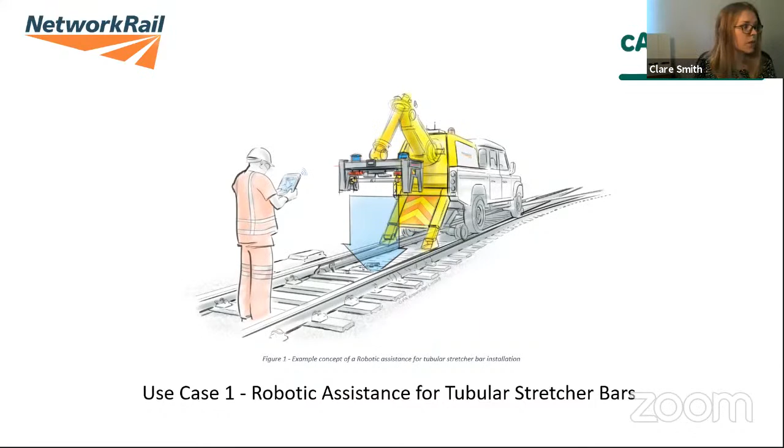So the equipment referred to previously is shown here. You can see the colourful variants of motion units, and underneath those is a tubular stretcher bar. And there are also variants of these. One tubular stretcher bar is installed with two motion units attached to it, one on either end. The combination of motion units and stretcher bar is determined by Network Rail standards, and this is prior to the task, and they can be pre-prepared by a competent operator to produce what we'll call the cassette, so the motion units and the bar attached, I'm going to refer to as the cassette from now.

This pre-prepared cassette should then be lifted by the robotic arm onto the vehicle for transportation to site, and that will eliminate the manual handling instance, the first instance of that. The number of cassettes that are needed per job can vary, and this is between 2 to 7 in order to complete one switch installation. Ideally, the robotic system will accept all variants of tubular stretcher bars and motion units, and they are all of very similar size and build.

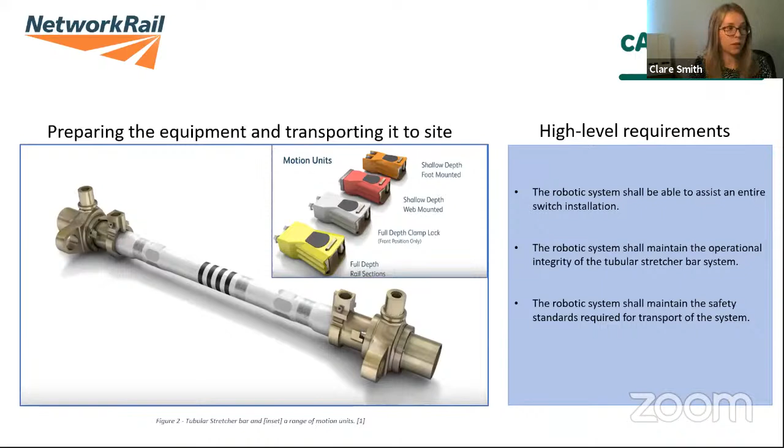Once at site, dependent upon the job, typically an old tubular stretcher bar and motion units needs to be removed first. This involves unbolting the motion units, which you can see on these pictures are the yellow ones. We unbolt them from the rail before lifting the cassette from between the rails. It's essential that the robotic arm can complete the lifting element of this task, and it's desirable in the future, perhaps, for it to be able to remove the bolts as well.

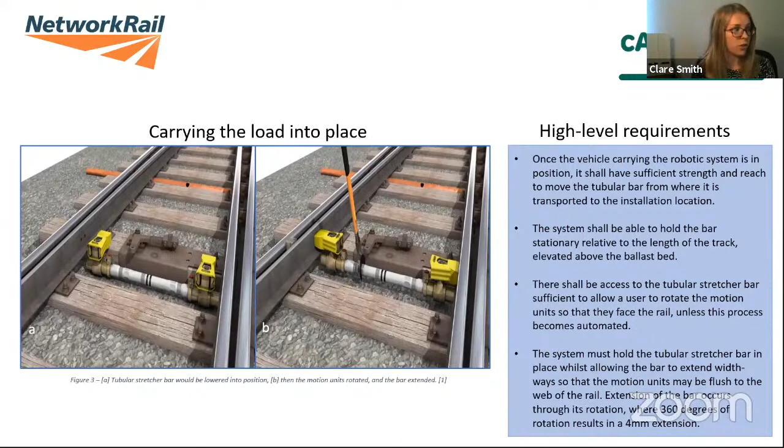So once the bar and motion units are in the correct orientation, the operator drops gauges between the motion units and the rail, and these measure the distance between the two. There's a specific measurement required for both sides of the rail, and this ranges between 2 to 60 millimeters. And this is based on calculations using the width of the rail, and it depends on which side of the rail we're on, whether it's the open switch side or the other side of the rail.

So as a recap, at present, our essential criteria for the robotic arm are the ability to lift a pre-assembled cassette of around 75 kilograms, the capacity to hold a cassette in place, enabling operators to safely move around it and complete adjustment and securing or unsecuring tasks. And we have ambitions in the future for the robotic arm to be able to adjust the length of the tubular stretcher bar and position the motion units via rotation, measure small distances between the rail and the motion units, and untighten or tighten the bolts to a specified torque.

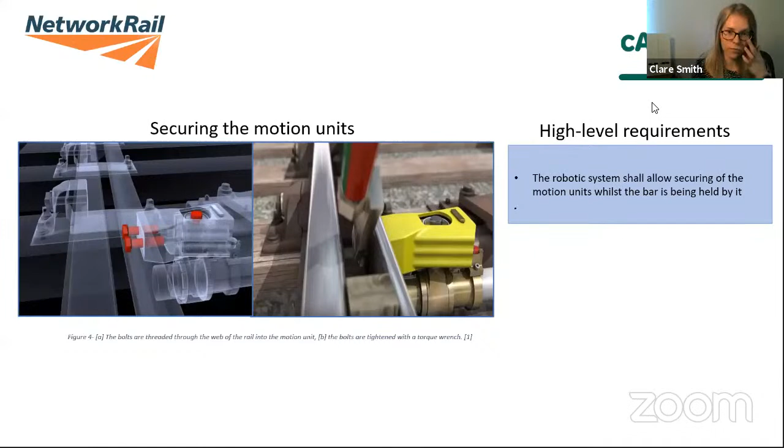Morning, I'm Dave Clements. I'm the Senior Asset Engineer for Rail Management in Wales. Just to give you a quick overview of what we're looking for. So we've got various inspection trains that have got an array of inspection technology used to provide data to maintenance and asset management, so we can manage our rails.

Sometimes the technology breaks down or train pathing issues mean we've got a section of track that's missed. We can either request another run of the train, which can be disruptive to other routes, or we do currently have another mechanical means which requires us to take a possession of the line, or we do it on foot by pedestrian testing and inspection.

So the loss in train-based inspection can limit our data collection coverage, doesn't always fulfill the data capture that we need, which could mean we've got to wait till the next planned run, which could be in 6 months' time, to recapture and update the data that we collect.

Pedestrian inspection on foot has quite a few drawbacks. It interferes with other planned inspection work, can cause a backlog in our other planned work. It requires staff to walk on the track. We're moving to 100% green zone, so it requires a lot more planning these days. The speed of the inspection is obviously reduced. The distance that we can cover is limited, and the data collection is limited. We haven't got technology that records as we go currently.

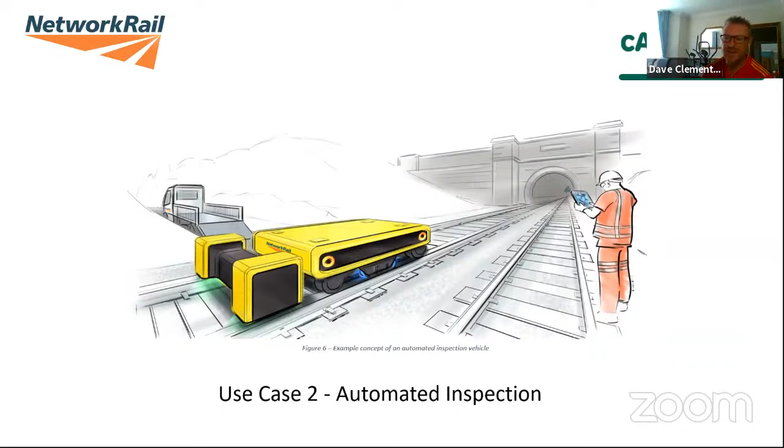So we're looking for something that can do ultrasonic testing, a means of detecting rolling contact fatigue, a means of capturing the rail profile, rail depth, camera footage along its journey. It needs to be ergonomically friendly, easy to handle. And the most important thing for me is locational accuracy. If you go to the next slide, please, Alice.

So it says here, product must find, define, and verify rail defects. Currently, we've got the ultrasonic test train, which gives us suspect defects. I can't see any means at the moment with robotics that may verify suspect defects for us. We're talking robotic arms and probe manipulation and all sorts of things like that for that. So at the moment, we're looking for something that can tell us there's probably a defect there, and then we send someone out to verify it.

An example concept in the system could be an autonomous vehicle that could be loaded at one access point and travel to a predetermined access point at the other end. Not just for recovering things that the train has missed, but we could use, say, Severn Tunnel as an example, which is 4.5 miles long. We could stick it at one end, pick it up the other end, and it records all the rail data we need through that tunnel without having to walk through the tunnel.

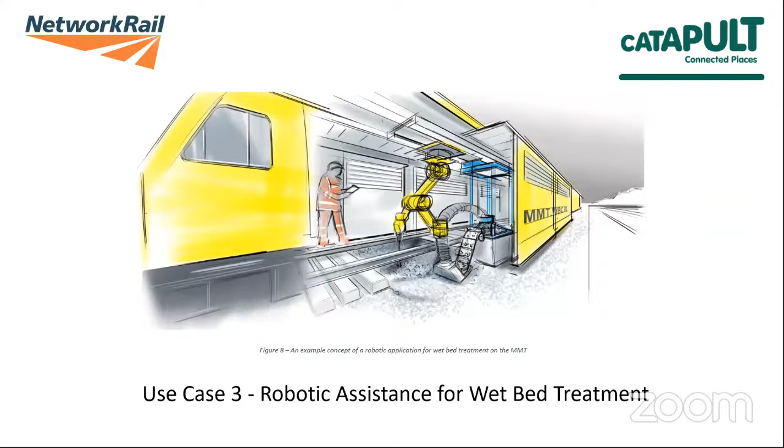In this case, we're looking for some robotic arm to help with wet bed removal. Currently, labour-intensive routines are conducted within the mobile maintenance train, which can be improved upon for the health and safety and maintenance of the teams.

At the minute, we have risks such as repetitive strain injuries, injuries through manual handling, and also exposure to vibrations. We're looking to investigate ways to reduce the likelihood of these injuries and improve where possible. Some of these difficult tasks lend themselves to robotics because of their repetitive nature, or a well-defined workspace, or the style of work, such as being labour-intensive.

A robotic arm tool developed to conduct some of these repetitive labour-intensive tasks could improve maintenance personnel's well-being. Additionally, the automatic recording of maintenance data during the robotic application's work could improve visibility of network rail status. Through discussions with the sponsor of the route and the maintenance team, the treatment of wet beds has been selected as an activity that would greatly benefit from robotic assistance. Next slide, please, Alice.

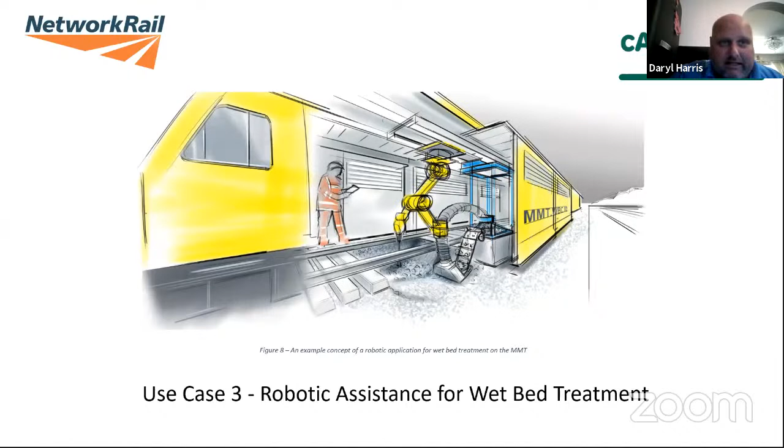As you can see from the diagrams, the localized area of wet beds, spoiled ballast, can be anything from 3, 4, 5 beds, ranging up to 60 plus beds. So when the teams arrive on site, they have to break up the spoiled ballast by use of a breaker, which at the minute is a vibrating Hilti tool. The ballast is then removed manually, bagged up and removed by the hoist on the MMT. We can remove in a shift up to 10 tons of spoiled ballast manually.

So we're looking at something that can assist with the removal of this ballast, also bag it up and remove it from site or into the intermediate cart on the train. Once the spoils are removed from between the sleepers, we then move to remove the spoiled ballast from underneath the sleepers, creating a good flat bed for us to reintroduce new stone and consolidate against. We're looking at digging a minimum of 8 to 10 inch below the sleepers with a crossfall of about 3 inch, 75 mil if possible.

And then after the new ballast is put back into the track, it needs to be consolidated. At the moment, we're using Robel's vertical tampers, but this can still leave us with a 5-day consolidation period after with full traffic before we can lift any hot weather requirements for watching and inspecting to make sure the track doesn't move. So if we could find something that could help remove the ballast, reintroduce the ballast and then consolidate after, that would be ideal.

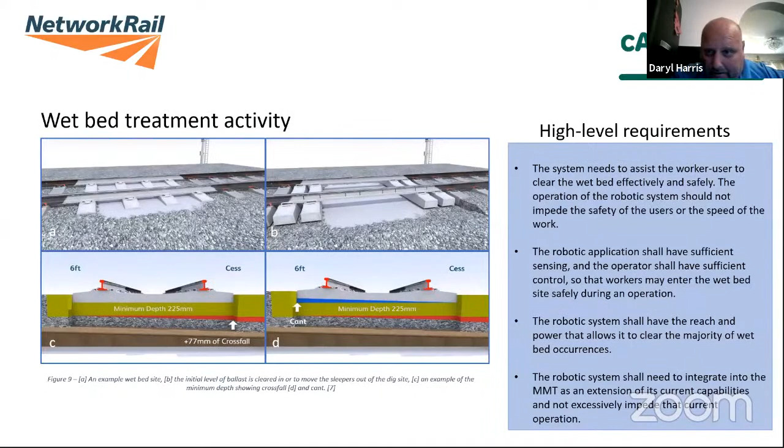I think we've covered most of it there. Alice, any further questions? If anybody wants to fire them across, I'll help where I can. Thank you. Thanks very much, Daryl.

Okay, so we have now heard from all of the separate use cases. Just to reiterate, we had use case 1, robotic assistance for tubular stretcher bars, use case 2, automated inspection, and finally use case 3, robotic assistance for wet bed treatment. I'd now like to open up the floor for questions. I will stop sharing my screen, and now we will begin looking at the Q&A part of the chat.

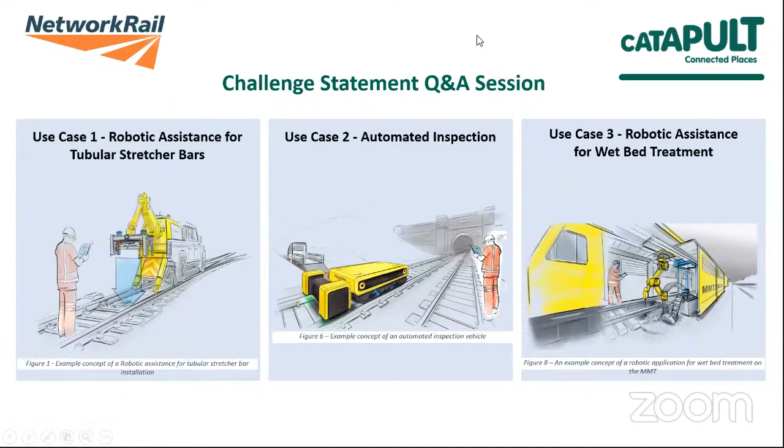Okay, fantastic. So this first question is for concept use case 2. And it is: I believe Network Rail has 6 survey yellow trains currently. How many inspection robots are expected? Will Network Rail be the only customer, or will train operating companies and civils also be a customer? So I'll put that now to Dave.

We've got 4 ultrasonic test trains that contain most of these sensing probes. So those 4 trains are more or less in full use. So we are looking for something that can capture this data when we can't plan and when we've got a gap. On Wales, we've got 2 delivery units, and we have used an alternate method of testing other than the ultrasonic test trains. And I would have thought in Wales we'd probably have 1 of these, maybe 2, 1 for each delivery unit. It depends how much we use it.

We could decide that if this works, we don't need the ultrasonic test train on certain branch lines, and test branch lines under our own steam with this bit of kit. So, hope that answers the question. It could be 1 per route. Some routes have got multiple delivery units, so it could be many per route. Thank you, Dave. Next question is also to you.